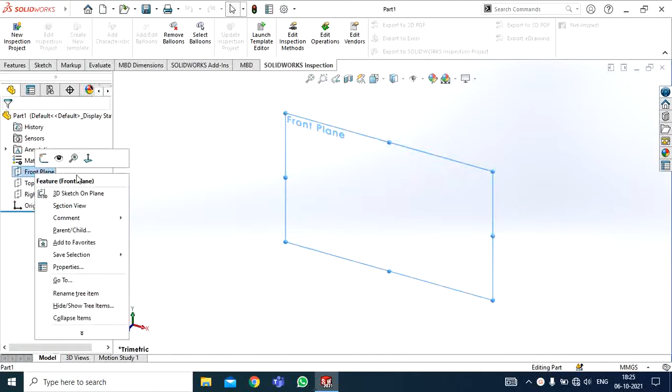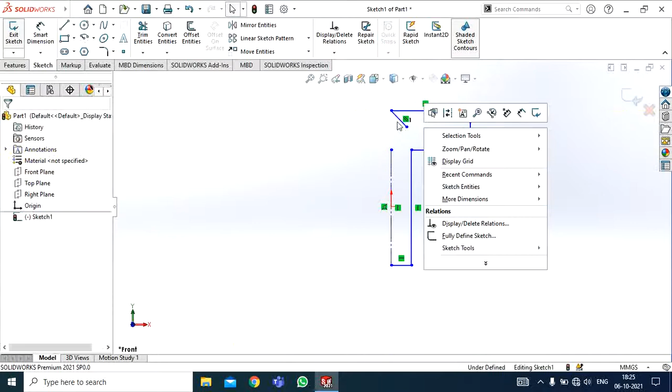So I'll just start off by making a basic sketch. I'll go to the front plane and draw the screw first, starting off by drawing a center line. I can do it more simply using just circles and extrude, but I want to do it by revolve boss base. That will require multiple operations, but through this I'll just draw the sketch, and in one operation my screw will be complete. All that will be left is making the threads.

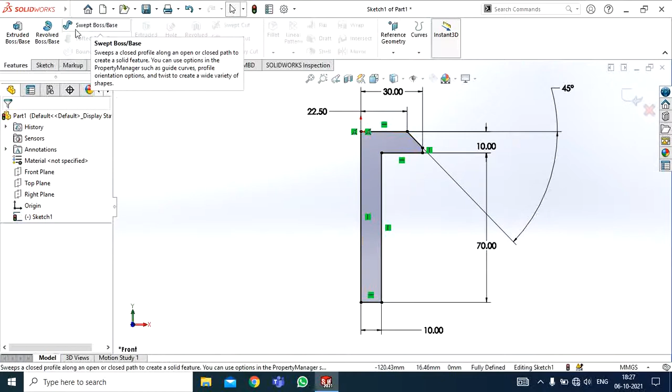I'll first define it. So you can see my sketch is fully defined now. I'll go to features, revolve boss base, and I'll select this line as the axis of revolution. So you can see this is the structure that I've got.

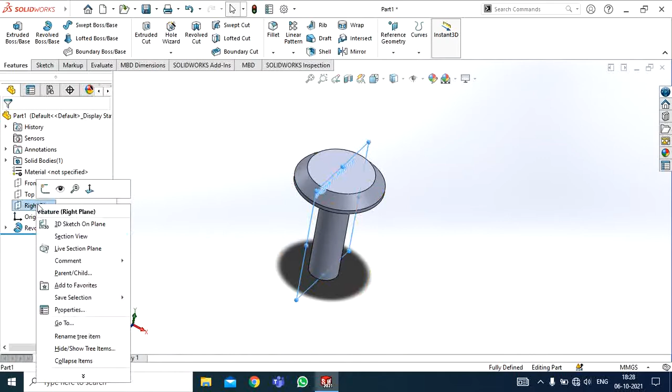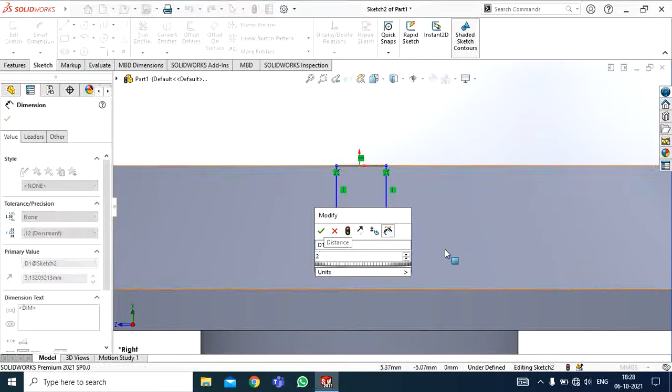I'll quickly go to the front plane. No, I'll go to the right plane as of now. I'll select line and make an indentation here. This I'll keep as 2, whereas this will be 3. I'll make the origin coincident with the center of this line. So the sketch is fully defined now.

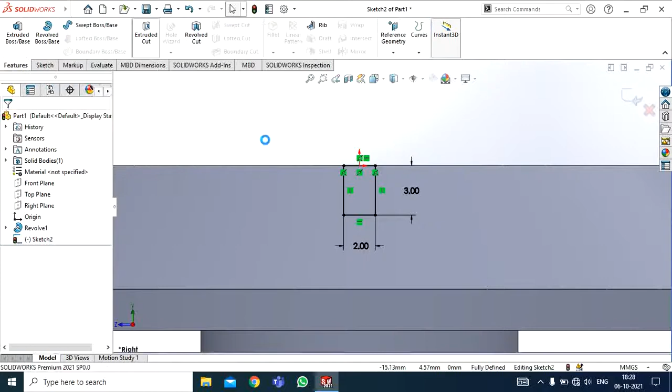Now what I'll do is I'll go to extruded cut, through all both. So here I have this. Now I'll go to the threading part.

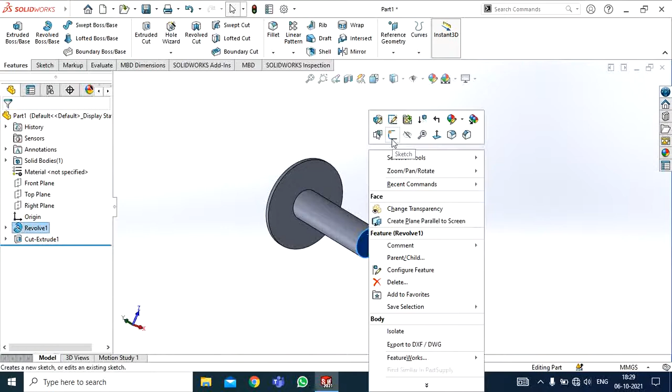So I'll not be using Hole Wizard for this. What I will do is, first of all, I'll enter sketch here and convert entities, so I have the circle converted. Then I'll go to features, curves, helix and spiral. Now as you can see, there is a spiral originating from the circle I made.

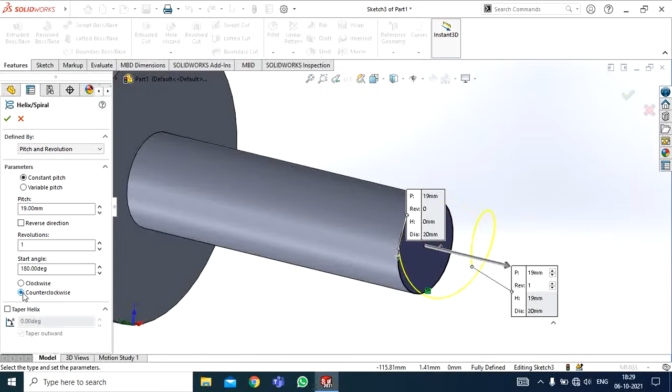So first of all, I will reverse this direction by using reverse direction, and I can give it by height and revolution, or height and pitch if I want. I'll go to height and pitch. The height of this I want as 50 millimeters. As you can see, this is very large, 19 millimeter pitch.

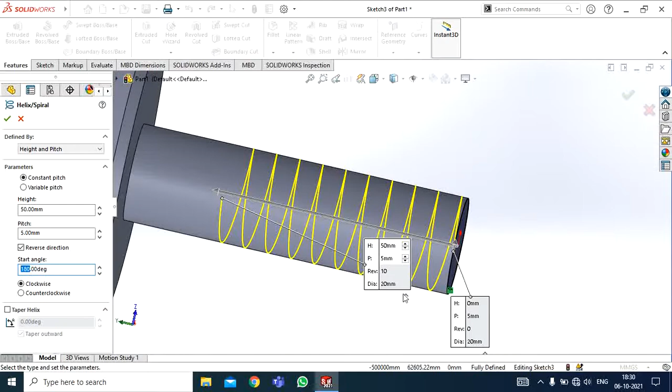I don't want that, let's just keep it as 5 for now. I can also change the start angle here, since it is starting right tangentially to the circle, so the start angle is 180. If I want, I can change it, let's say 120. So what happens is, as you can see, it is starting at a 120 degree angle. I think that's fine.

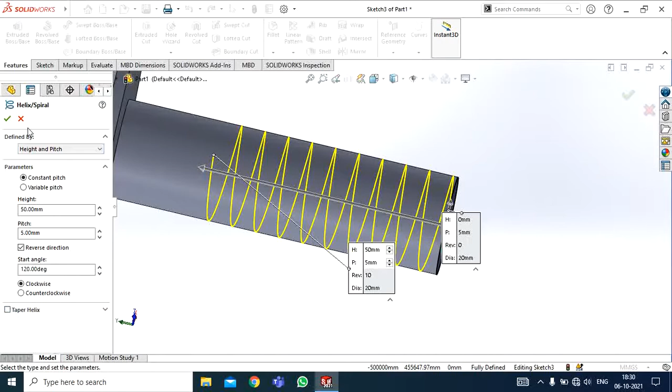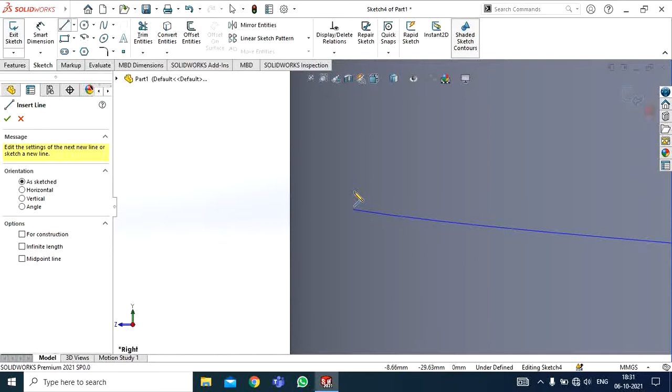So I'll select it. Now what I'll do is I'll go to the right plane, I guess. Yes, I'll go to the right plane, enter sketch. Now with this point, I will be drawing a figure. I'll be drawing this trapezium. You'll see why. First, let me define it.

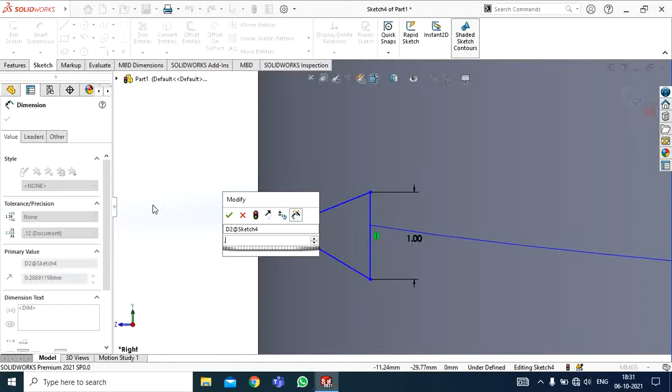Okay, not this point. Give it as 1. Give it as 0.3. And I'll be giving this height as 0.7. That's okay. Now what I'll do is I'll exit the sketch.

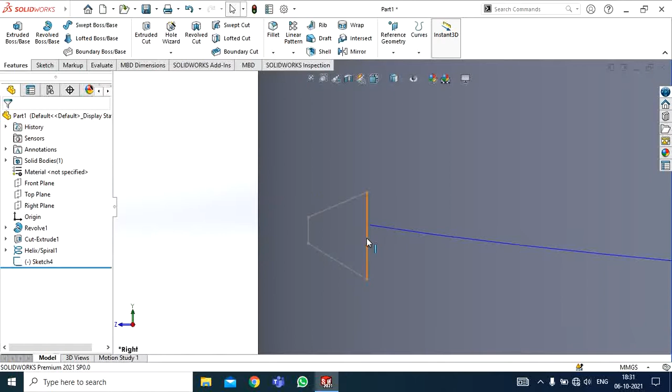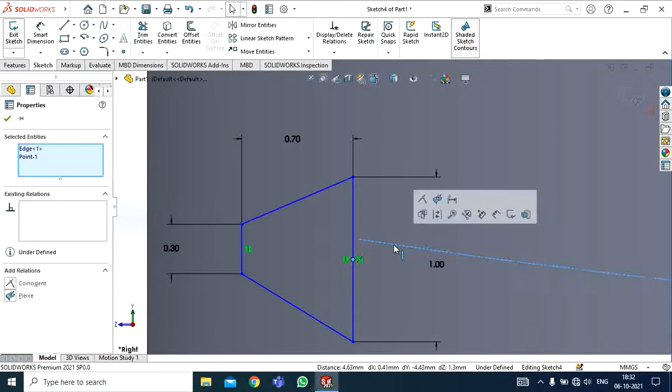And I'll select this and this line. I want to make a Pierce relation. Okay, so first of all I'll enter the sketch again and locate the center point for this line. I've selected it. Now I'll select this and make Pierce. So as you can see, the trapezium ended up being here, but that's completely alright.

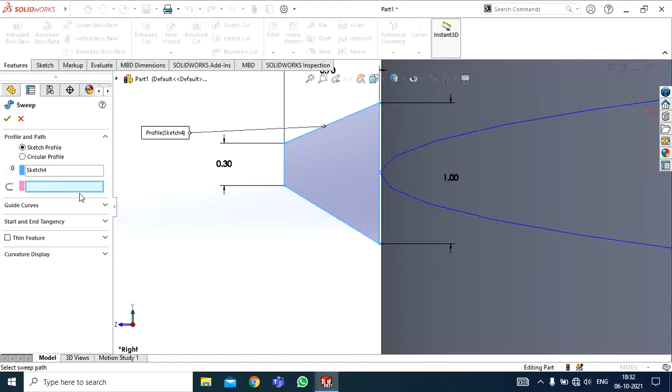I'll exit the sketch now. I'll go to features and swept boss base. Now what I'll do, for the profile I'll select this trapezium that I made, and for the path I'll be selecting this helical spiral, and as you can see, this has made it only for one direction. If I select this third option, it will make only for the second direction. Since I want both, I'll be selecting this middle option.

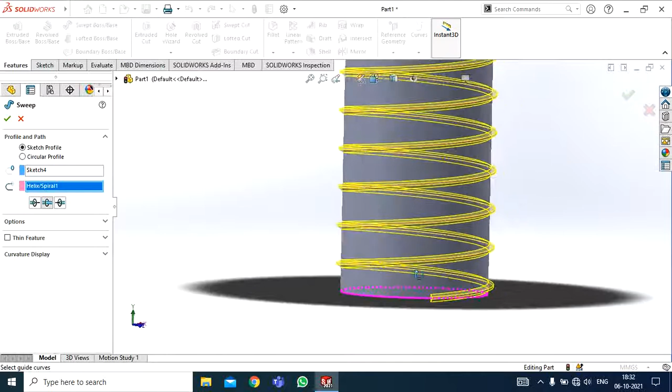As you can see, a thread has been made here. Now I'll just click on OK. I'll also hide this because it doesn't hide on its own. Now as you can see, the screw which I wanted has been made.

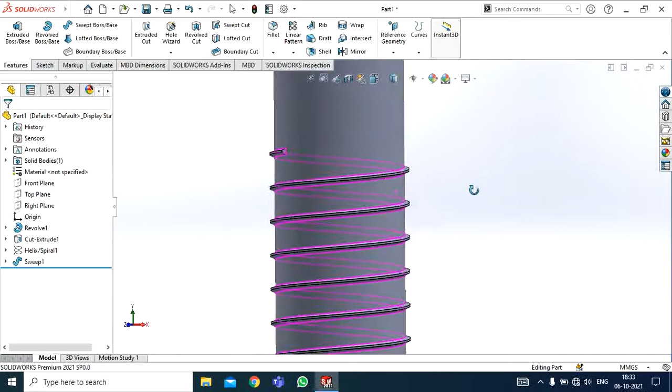I can change this by, as you can see, the thread is a little thin and it might not suit the operation which you want, so you can make the figure as you want. Also, if you want to make the thread with an indentation inside, not extruded, you can make the figure inside and see that the piercing relation goes inside. So you can basically reverse the trapezium, and after that you will go to this swept cut feature and the same operation will be done.

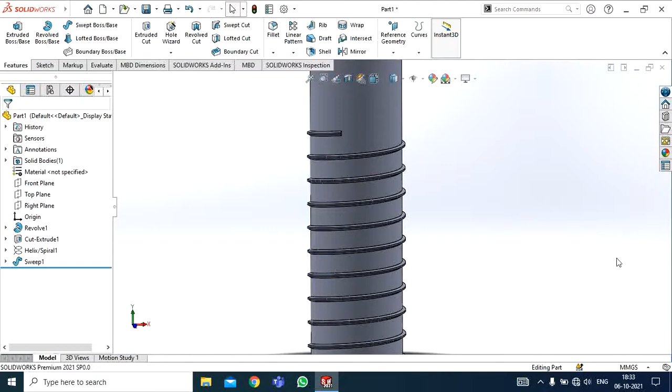So this is an easy way to do it. Hole wizard is also easy, but I prefer this. So okay, thank you for watching.